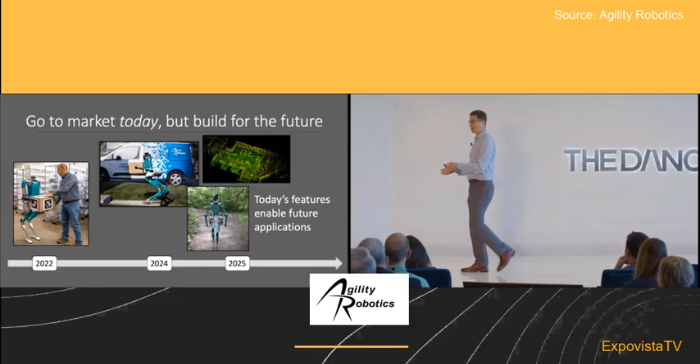Just carrying stuff from one place to another is useful. There are so many applications for that in semi-controlled environments, like in warehouses, like in general legacy industry - environments that have stairs, environments that are not going to be modified for the robots, where the robot can go where humans go, but do something really simple, just, I don't know, carrying a photo mask in a clean room

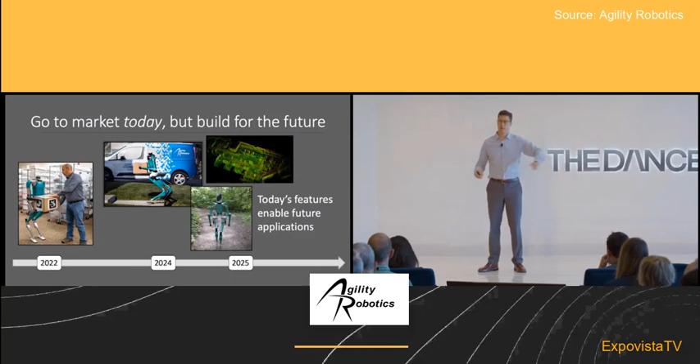from this machine through the room and up the stairs to another machine. That's an application that a company talked with us about. And they're paying very highly paid machine operators who are in a clean room environment quite a bit of money, and they're spending a lot of their time just as gophers, you know, carrying stuff around. So having a robot do that would be a really useful way to leverage the value of the human being.